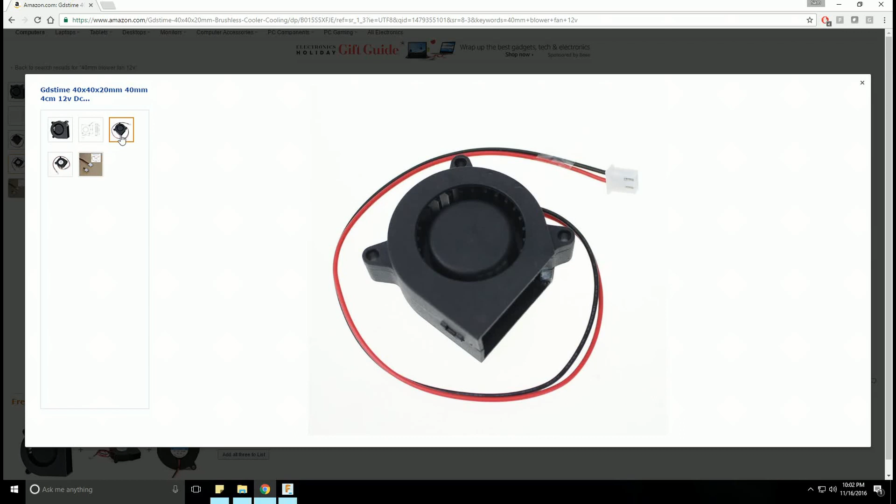What I like about this is that it barely weighs any more than a 40mm fan. It has a lot more ability to develop pressure, which is important for nozzle designs where you have restriction and the fan can't just blow in an unrestricted manner. Also, because it's a cage fan, we can mount it vertically, which means we're not going to have a lot of mass hanging off of our hot end, which should keep the hot end fairly stable and not add a lot of noise or ringing to our prints.

I'm going to be using my caliper, and I've got one of these fans in my hand right now. I'll be using that as I work through the design. I'm just doing this off the cuff. I haven't worked out any design prior to this. You're going to be seeing the design process exactly the way I would approach something if I were starting from scratch. If you don't have a caliper, I would recommend picking one up.

You can pick up even a $20 cheap one for this kind of work. It doesn't have to be an expensive machinist caliper. I'll put a link to what I'm using down in the description as well, in case you want to pick one up. It's helpful whenever you're designing things that need to fit or have specific dimensions that need to be accurate or match up. It's a good tool to have if you want to get into functional design and 3D modeling.

Okay, let's get started.

So Fusion 360, just briefly, I'm not going to go into the whole how to download or install it. There's plenty of instructions for that online. All you need to do is go to their website and you'll find the links you need. They have a pretty wide breadth of licenses that you can qualify for, anywhere from a student or educator to a free trial to actually free use as a startup or a hobbyist as well. So pretty much anybody out there is going to be able to find a license that works for them and provides 100% full functionality. You're not going to have any features that are disabled or withheld.

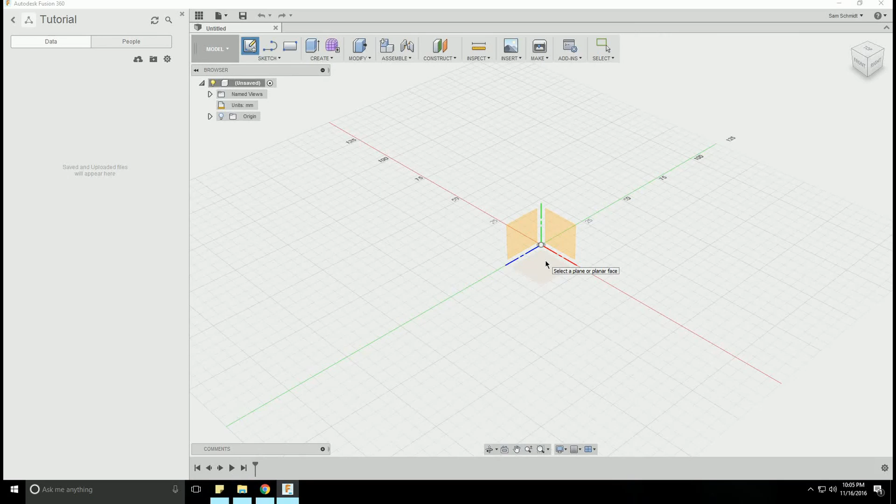So we're going to start with sketch. I'm not going to try to explain every single menu or submenu ahead of time. We're just going to take them as we hit them. Right off the bat, I'm going to start with a new sketch, and it's asking me which of the three planes, X, Y, or Z, I want to begin, and I'm actually going to begin in the front plane here.

Okay, so to start off here, I'm going to be just drawing a rectangle, and we can do it with a 2-point where we mark opposing corners, 3-point, or center. I'm going to do a center, put it right on the origin here. We're going to open it up.

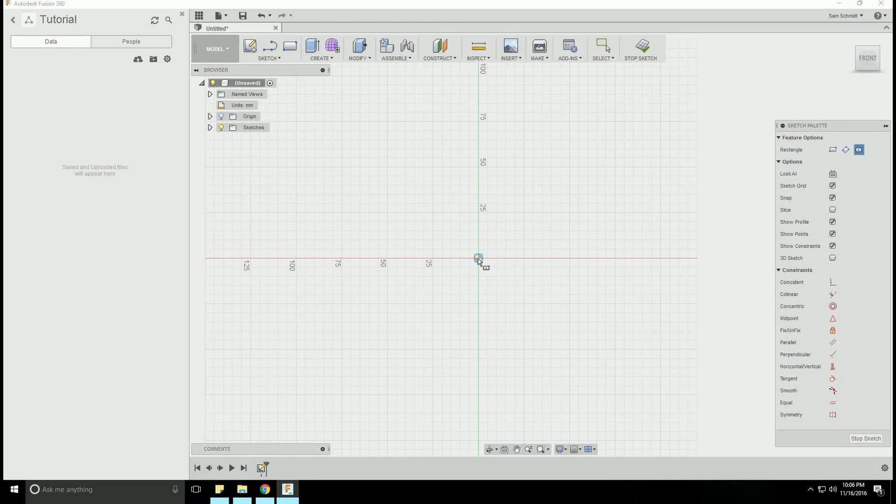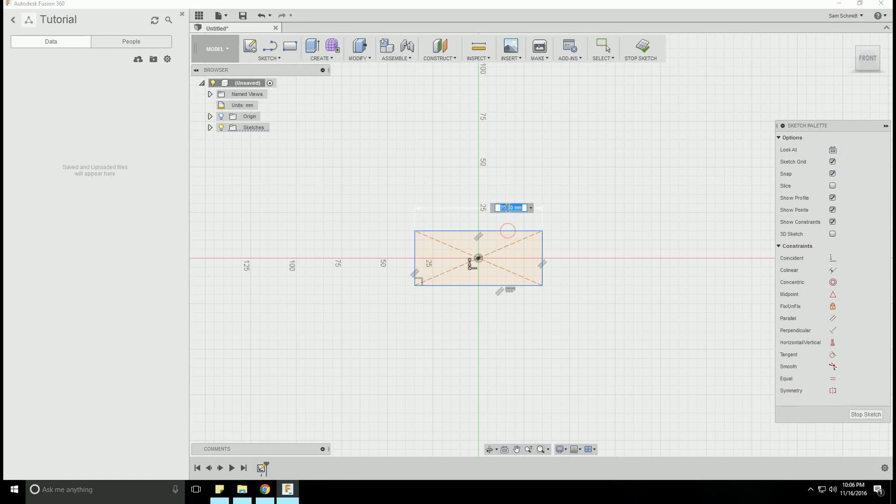I did a couple measurements on my Monoprice Select Mini before I began the tutorial, and I think I want roughly a 60 millimeter long rectangle, and you'll understand why I'm doing that in a minute. I'm now going to go down to sketch dimension, grab this side, and type in 60, pull that in.

And then the fan is approximately 20 by 25 for an opening. So I don't want my shroud to be too much smaller than that, because even though it's a blower fan and it's able to produce more pressure than a standard rectangular fan, the more open we can leave our duct, the more air we're actually going to get for cooling our part, which is the whole goal here.

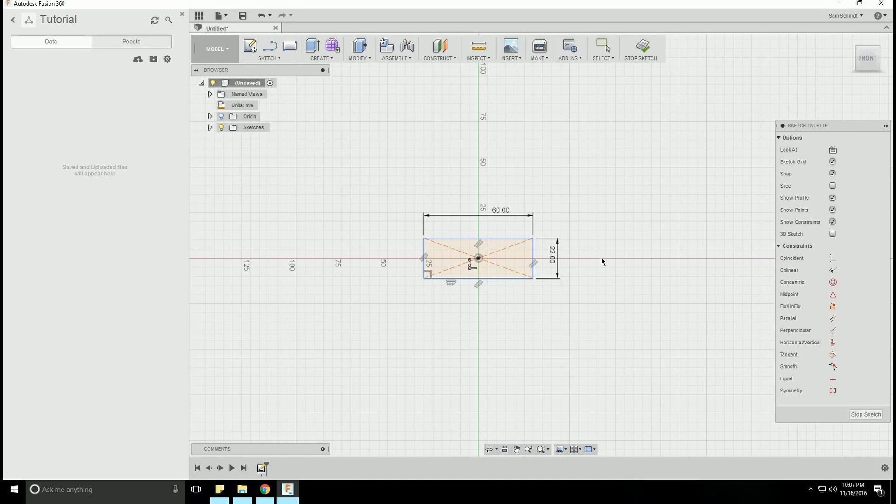So I'm going to set this other dimension, for the moment anyways, at about, let's do 22. I'm just throwing that out there. We'll see how long that stays around for, but let's throw that out there. Okay, so there's a rectangle, and you're probably going, wow, this is not a very good fan duct.

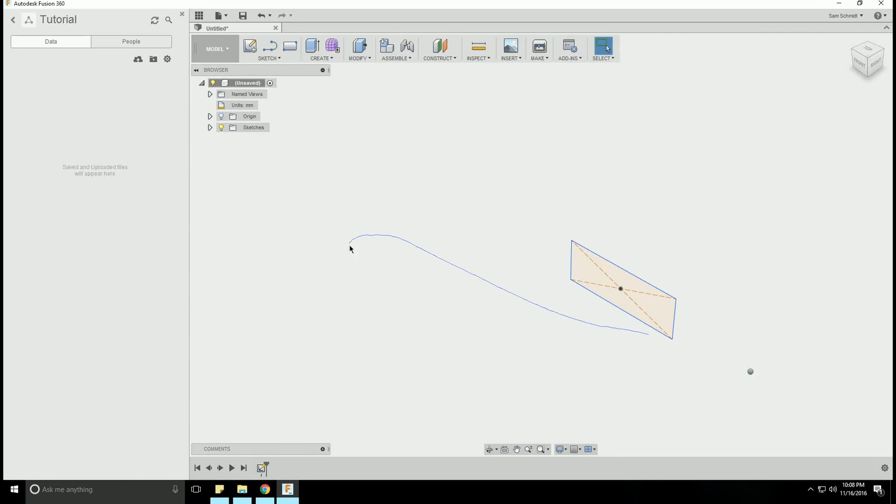What are you doing? And you will find out shortly. So I'm going to stop sketch, basically end the sketch and finalize it. Next, I am going to create an extrude, and it's going to ask me to select a profile. And I'm just going to select the sketch that I just created.

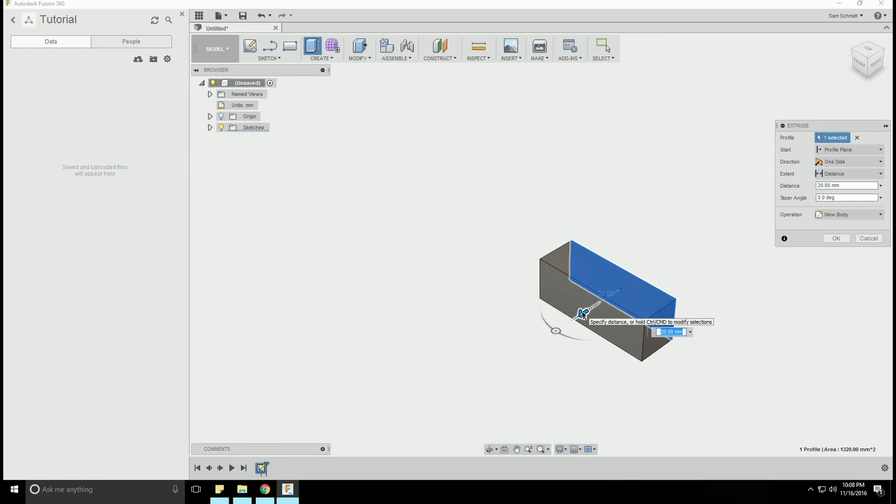There's a couple ways of doing this. You can type in a specific dimension, or you can grab this arrow and drag out your extrude. Again, kind of going off of my gut here, I think we're going to want a roughly 30 millimeter depth here. And we'll be able to go back and fine tune these if we need to as we go along.

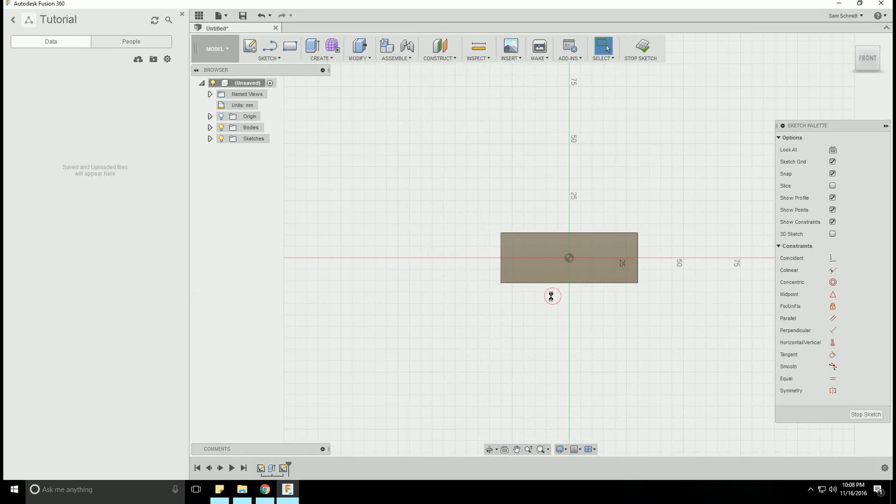Now I am going to create a new sketch, and I'm going to actually start that sketch on this face. And this is going to be the profile of our cooling shroud.

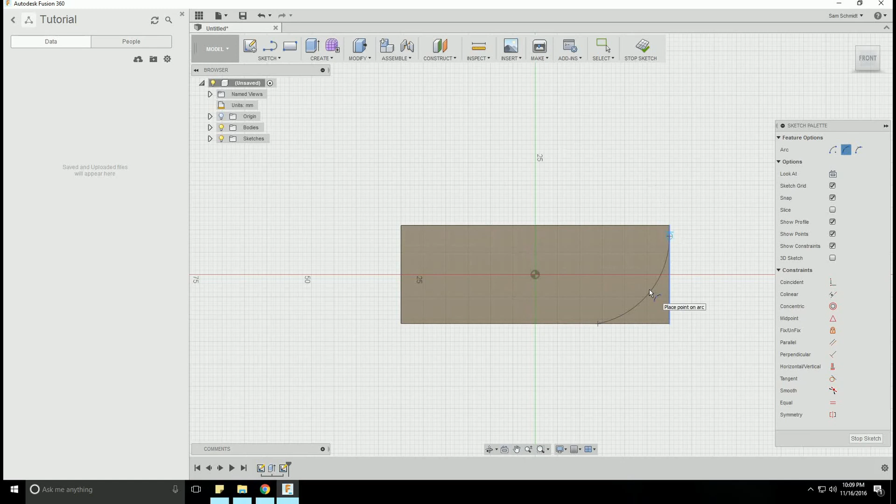Now, a couple things. We're going to go up to sketch. We are going to grab an arc, a 3-point arc, and we're going to begin it there, and end it roughly there. And when we get the tangent marker here, we're going to confirm.

Next up, we're going to go back to sketch. We're going to grab another rectangle, and we're going to make a 4 millimeter line, and we're going to go in about 25 millimeters.

And actually, we're going to tweak one dimension on that. We're going to make this 3.5. There's a method to my madness. We're going to go back to arc, back to 3-point arc, and we're going to grab here.

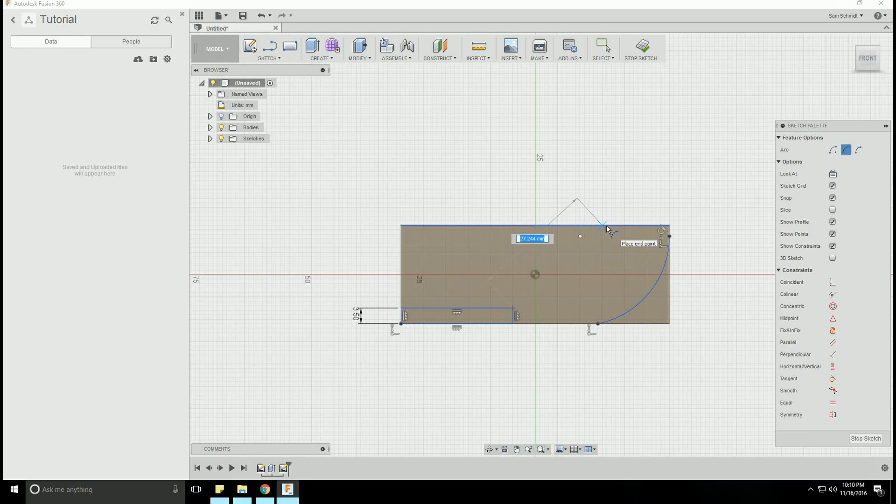Now, I want this endpoint to be roughly the width of our blower fan opening, which is right about 20 millimeters. So I'm going to select here. I am going to place the arc.

Then I'm going to go back to dimension. I'm going to grab the arc endpoint, grab the side of my shape here, and push this out to 20 millimeters.

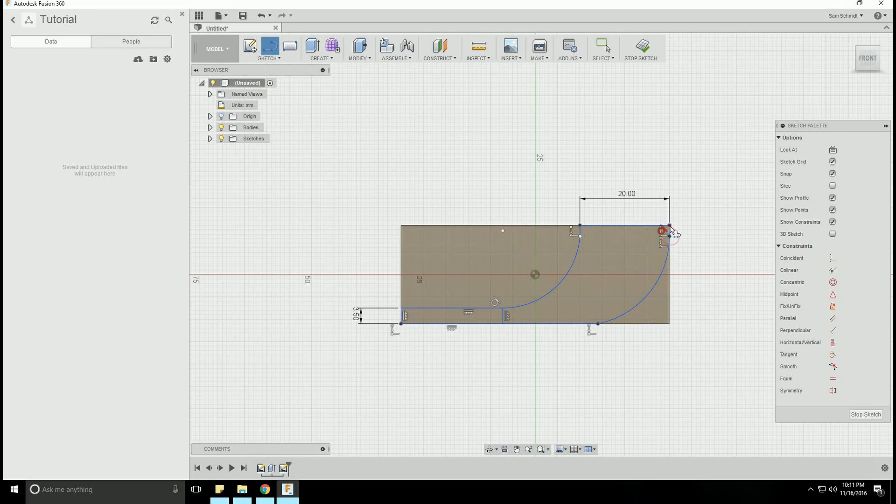Okay. Next up, I'm going to grab just a line. I'm going to connect this arc to this rectangle. And what I'm doing now is I'm just creating a closed sketch so that we can extrude this.

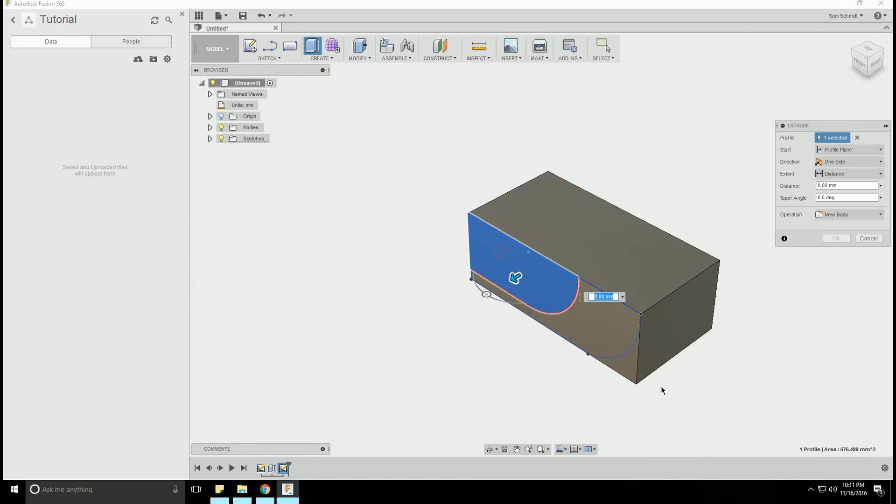Okay, so I'm going to go to create, go to extrude, and select the profile, select one side, extent all, and instead of operation of new body, I'm going to do cut. So I'm going to remove material, and then flip the direction. We can see here that with those constraints, it's going to remove all of that material. I'm going to select OK.

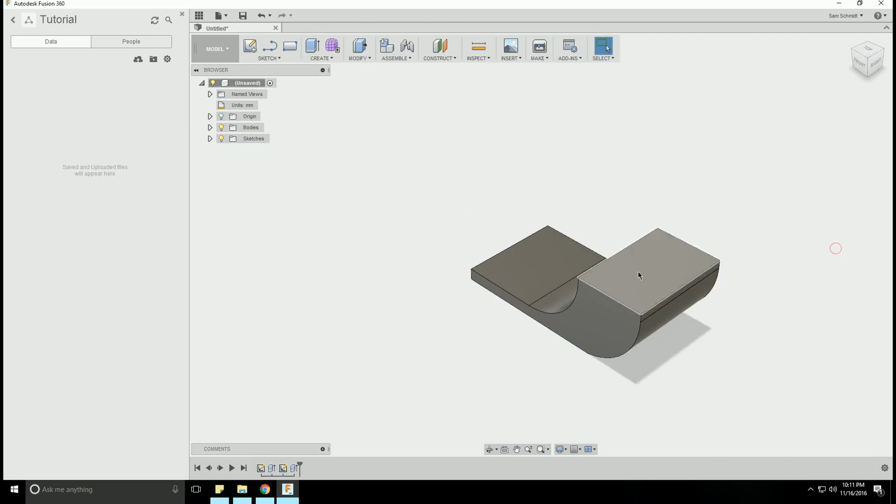And now, just maybe, you'll be starting to see our fan shroud take shape. Now, if you can imagine, because I haven't explained where this is going to mount or how this is going to mount, but if you have a Monoprice Select Mini, if you can imagine your hot end coming straight down here, and if you can imagine a semicircle cut out of this so the air can blow in from multiple angles.

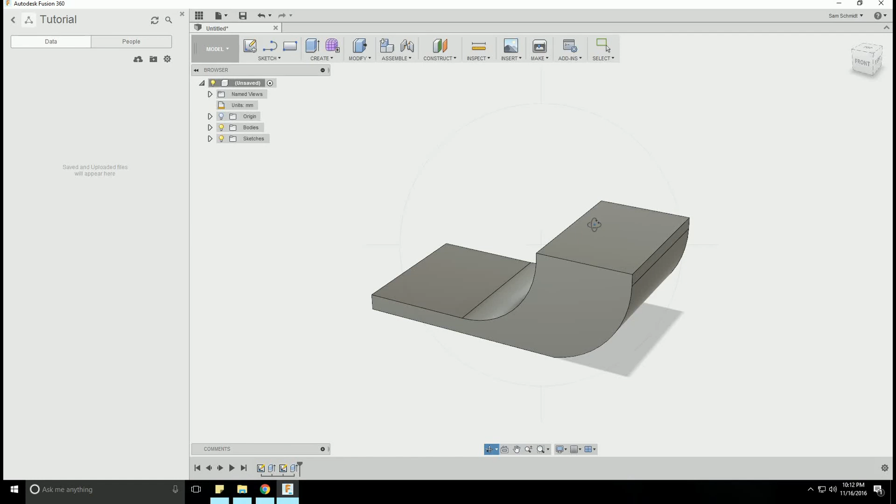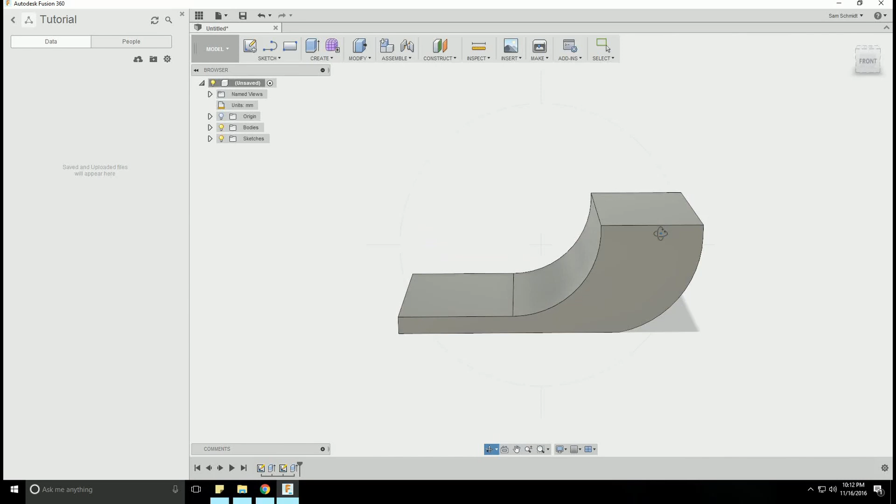And if you can imagine that this is hollow and there's a fan mounted right on this top section here, you can kind of begin to put together the rough goal that I have. And mind you, I'm working this out as I design it, so we're probably going to be tweaking this quite a bit. And you're designing this along with me, hopefully, so you're free to take this design in whatever direction you want to once you begin it as well. It'll be interesting to see what people come up with out of this tutorial.

Okay, so next up, we are going to create another sketch.

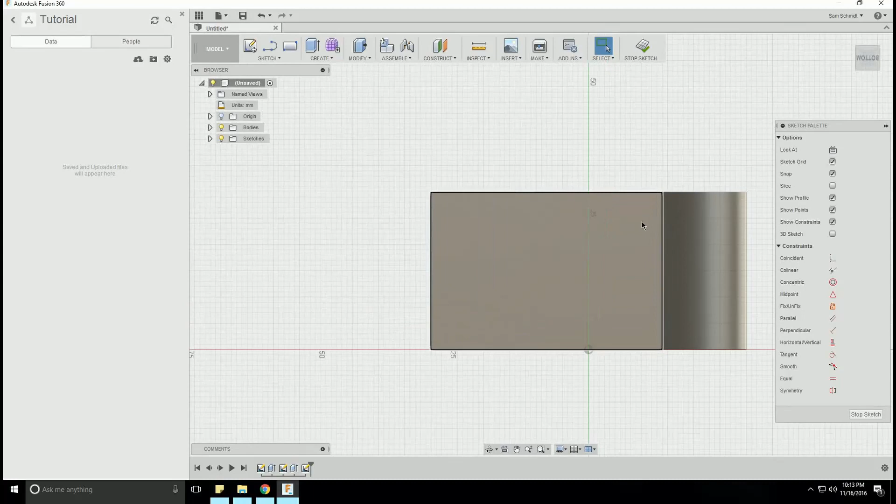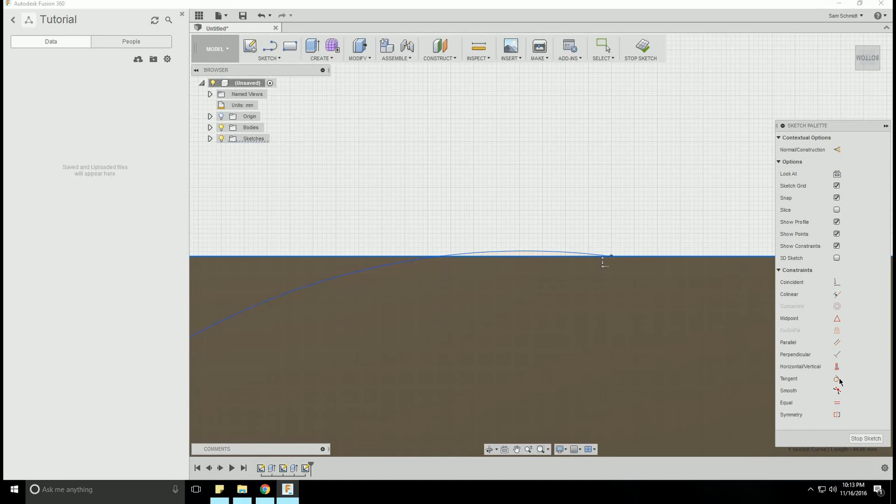We're going to look at the bottom of this and make a sketch here. We're going to grab a 3-point arc and put it roughly in the middle. Now, I don't want this space right here—I want this to be tangent to this line. So I'm going to grab those two and go tangent. There we go.

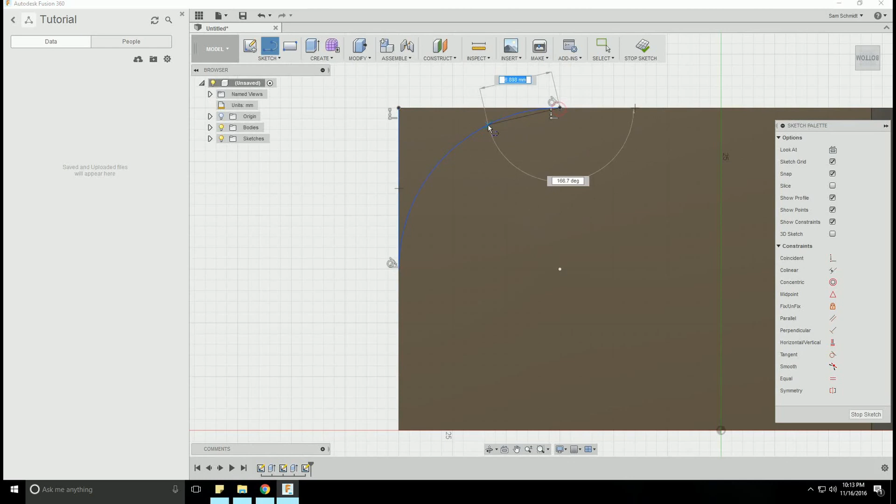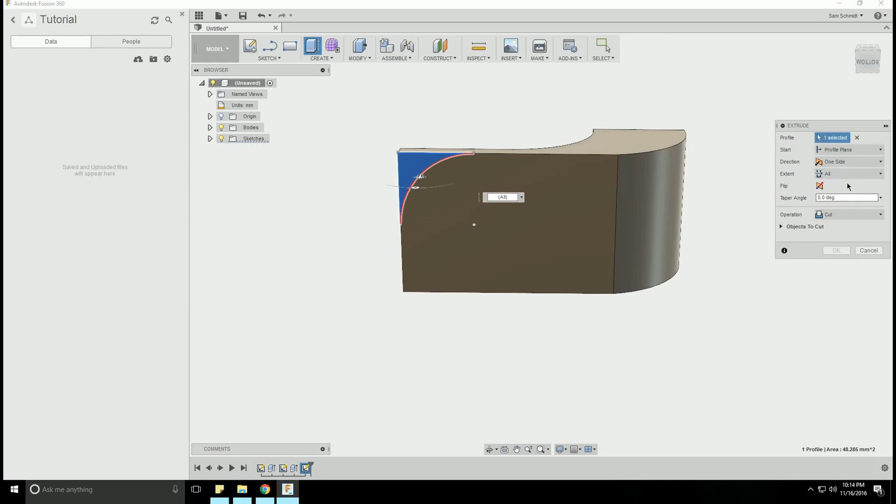Alright, let's close that off using a line. And I'm going to stop sketch. I'm going to extrude, select that sketch we just made, select operation cut, extent all, flip the direction, and click OK.

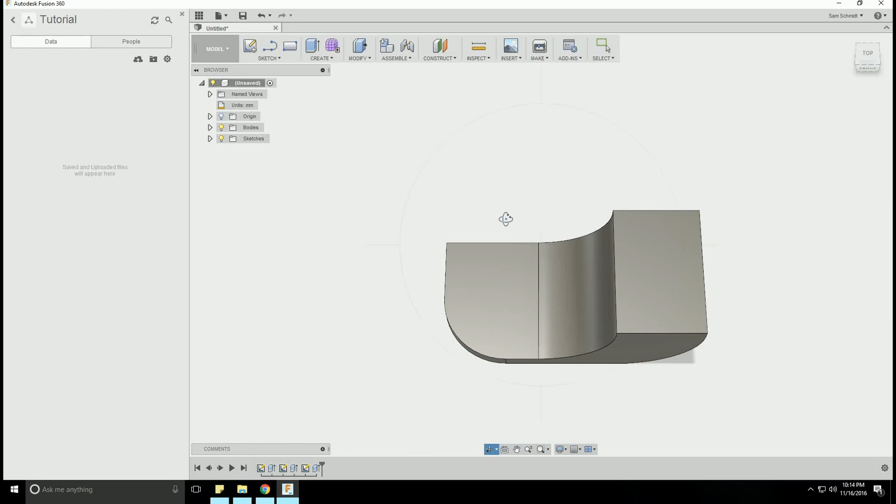And we are headed in the right direction. Now, we need to know if this is going to blow right up next to our nozzle, without blowing all over our heater block and unnecessarily wasting energy. What kind of radius do we need to cut out of here? If you look at your hot end, if you're using the stock hot end, you're looking at needing a radius of roughly an inch, or roughly 25 millimeters. So let's start with that idea.

Let's do another sketch, from the top here. Let's make a circle from a center diameter. I'm going to throw it in at an arbitrary point here, and we want it to be about an inch.

And we can grab this and move it around, so you can imagine as we move this around where the air is going to be blowing and how that's going to encompass the nozzle. The goal being that when we're done with this, we'll have it directing air not at the nozzle, but just right around it and down, so that as the plastic is being extruded we're blowing on it when it's appropriate, creating much crisper parts with clean overhangs and detailed features that sometimes get muddied if you're running with improper or no cooling and the plastic is staying molten for too long. So I'm going to go out on a limb and position it about here.

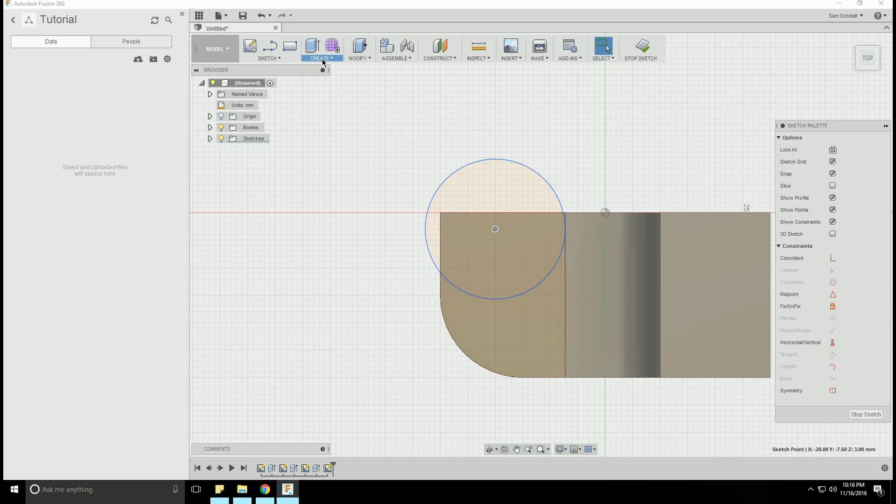I'm going to position it about there, and then extrude it. Again, we're going to do a cut, do all, flip the direction, and accept that. And now you can kind of see roughly where our nozzle is going to be located.

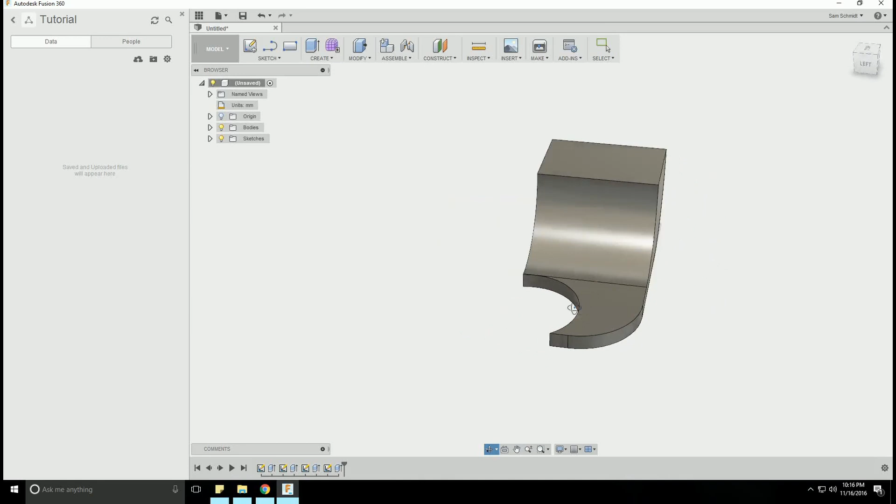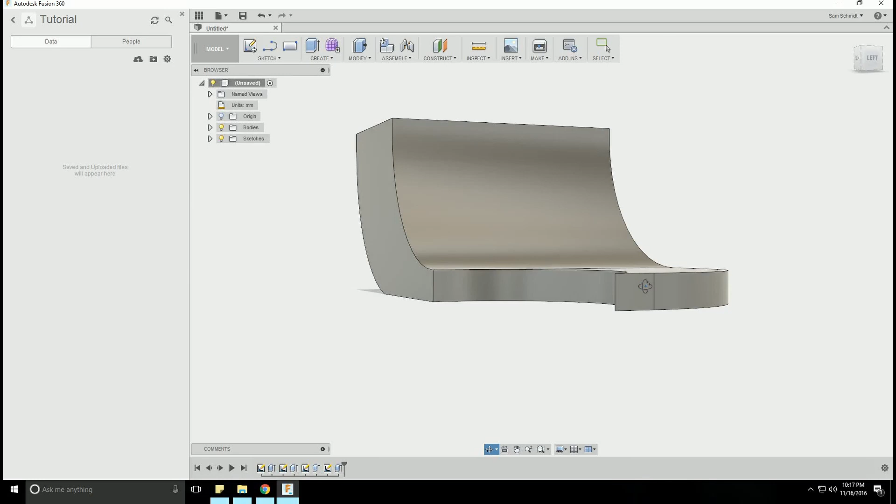Now, before we get too much further, we have to think about the direction we want our air to blow and how we're going to accomplish that. If we were to simply hollow this piece out, which we could do right now with a single push of a button, we'd have air blowing straight out. That would probably be okay, but it probably wouldn't be ideal.

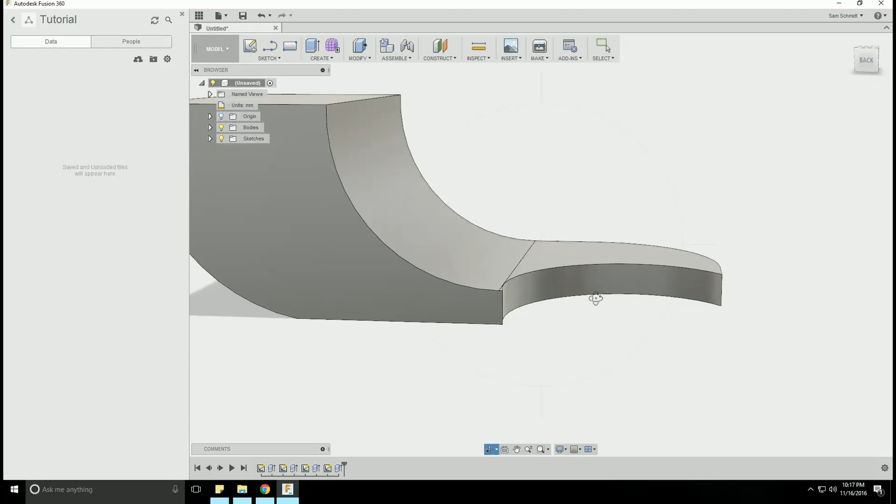So let's take a look at creating shaped airflow a little bit. It's not going to be perfect, and honestly, with the levels of airflow we're going to be generating with this fan, you're still going to get some air hitting the nozzle and the block a little bit, because you're blowing down at a surface, which generates airflow and turbulence around the heater block. But in the name of science, let's try to be a little bit intentional about this, and here's how we're going to do it.

So we're going to create a new sketch, and we're going to start it on this plane. We're just going to create a roughly 45-degree triangle, like so. And I want to leave 0.8 millimeters of material there.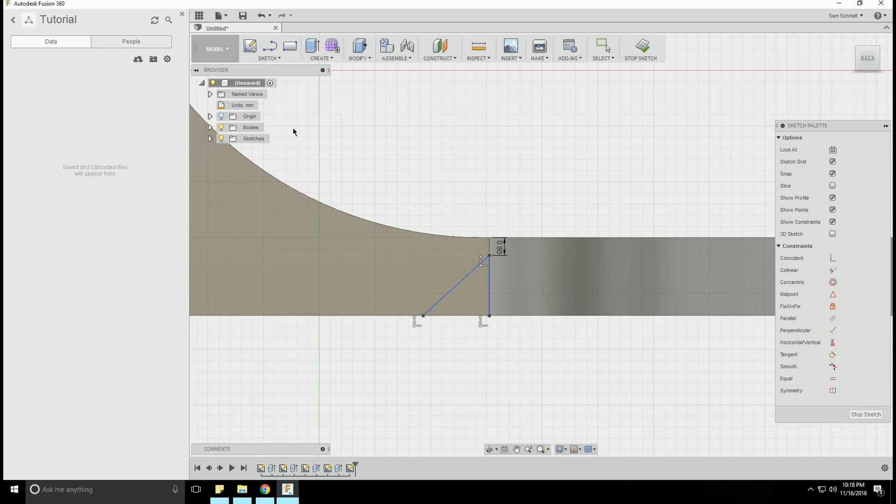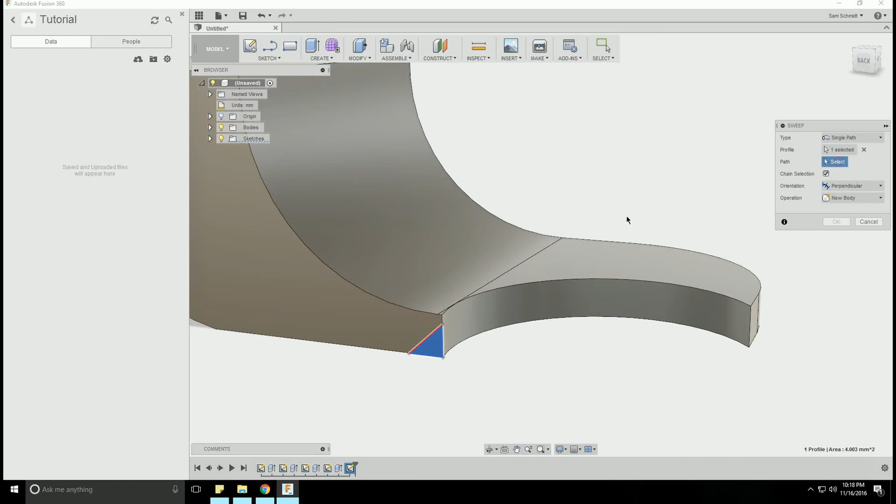And now I am going to do a create and sweep. Here's how we're going to do it: we're going to select this face, that's what we want to sweep. For the path, we're going to select this radius. And as you can imagine, we're going to be cutting. We want the orientation to stay perpendicular to the path, and that's about all we need. So we're going to select OK.

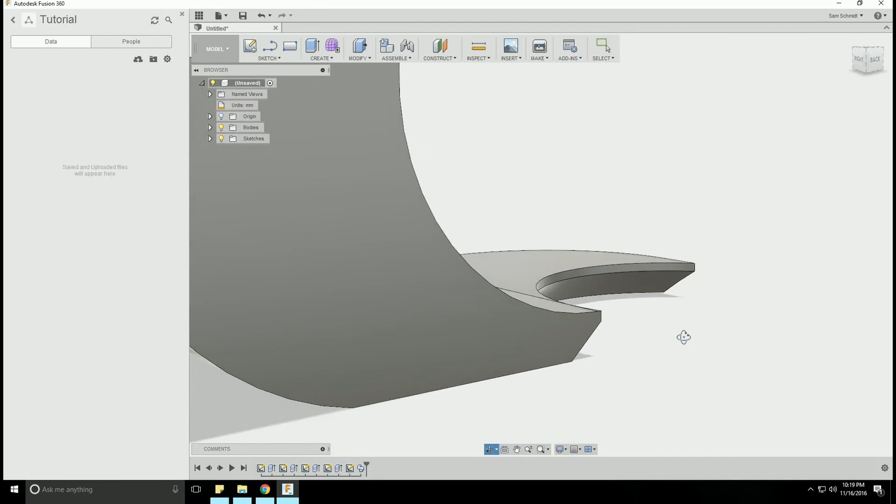Now you can kind of see that we're starting to make a little bit of sense here with the direction that hopefully we'll be able to encourage air to flow. Now, before we do anything else, let's go up to Modify and choose the shell option. We are going to shell from our nozzle face, and we want our thickness to be—let's do 1 millimeter for now.

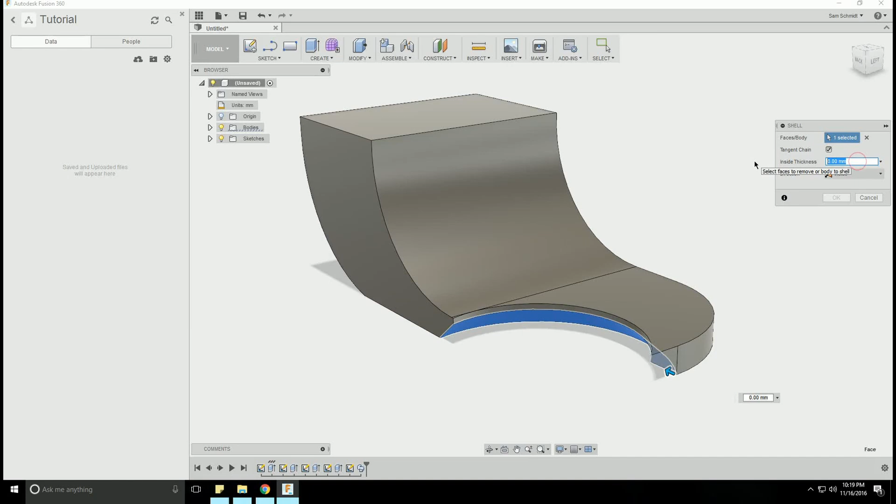Let's take a look at that. So you can see it's now hollowed out our entire shape, and it's left 1 millimeter of thickness all the way around. So that's pretty good.

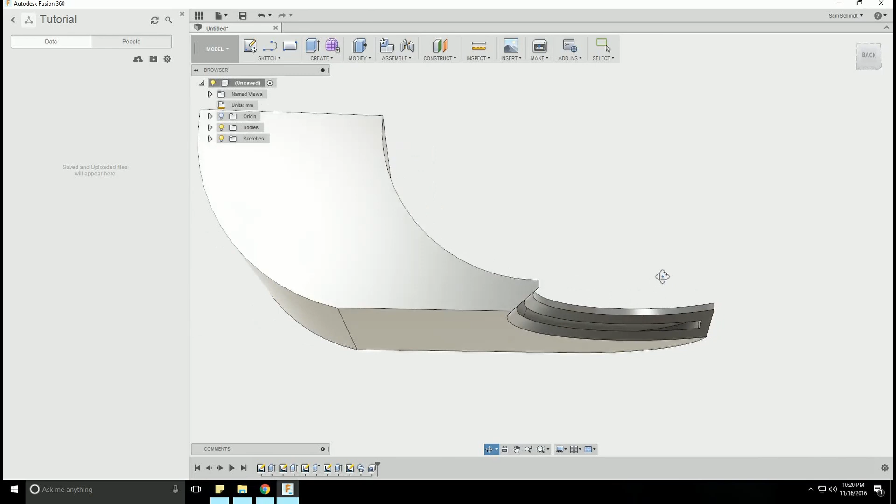I think for something like this, we could probably knock it down to 0.8 millimeters, and anybody printing with a 0.4 millimeter nozzle will be able to do a 2-shell slice. But we'll leave it at 1 millimeter because that means if you're using a 0.5 millimeter nozzle, you can still get exactly 2 shells. And if you're printing with a 0.4, you'll get 2 shells with a little gap between them, where you can do 100% fill or some percentage of infill, producing a pretty functional print.

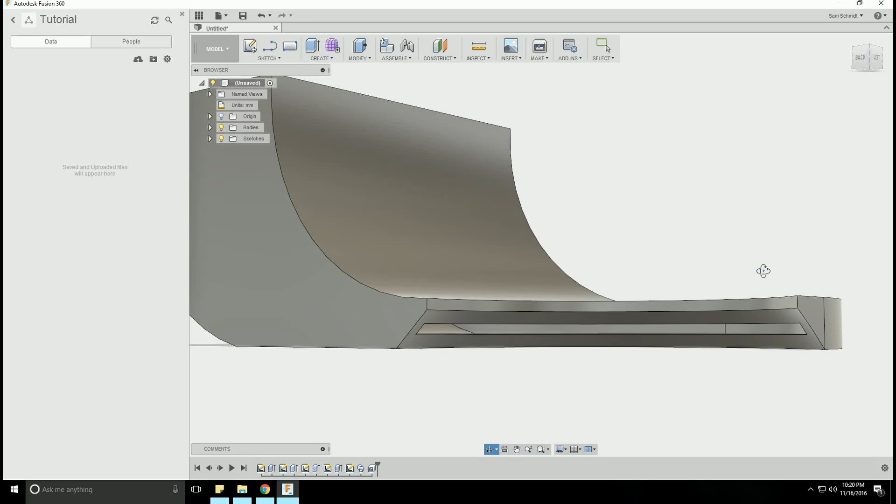Okay, so this is getting there. We've still got quite a few things to cover, and I'm going to back up that last option and show you something. Down here is our design history, so you can go back and look at every single item we've done, every sketch, every operation. I'm just going to drag it back one, and boom, our shell disappears.

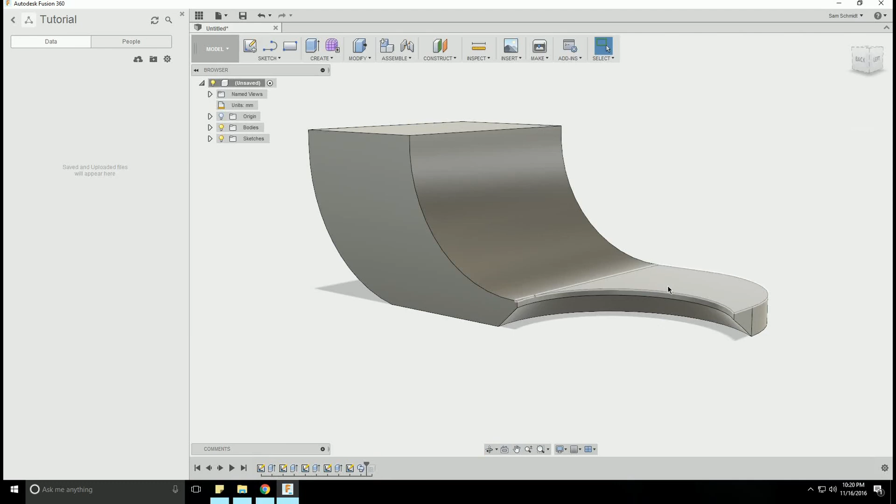One of the things you want to do before you generate shells is that if you have any type of radiusing, fillets, anything like that, you want to do that before you create the shell, because then the wall thickness everywhere will remain constant. If you do a shell and then do radiusing, it will create thin sections in your part that will not print well and will make a weak object.

So let's go up to Modify. We'll grab Fillet, and let's smooth this up a little bit just to make it look pretty. So let's grab a couple edges, and let's start with a 2mm fillet.

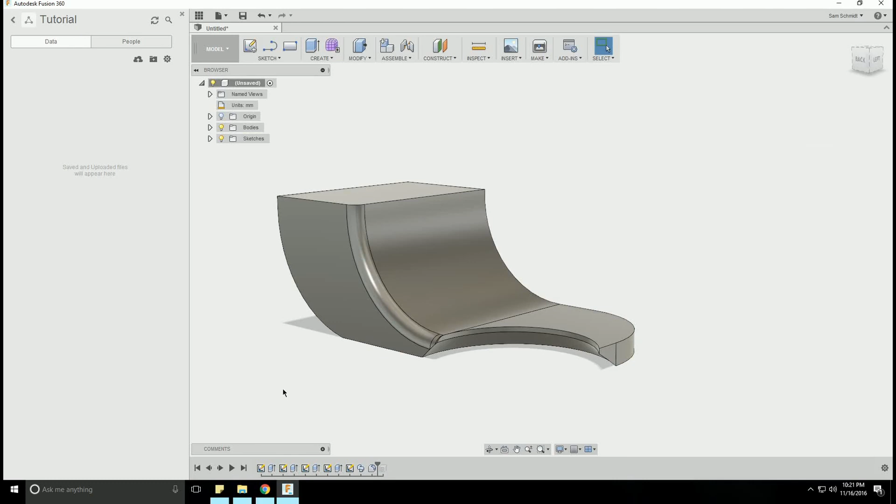Everybody just went ooh, ooh ah.

So I accidentally accepted that fillet. We can right-click on our fillet, which is the most recent item in our history, and click Edit Feature, and we can keep adding edges. Maybe, if it'll let me. There we go. For some reason it's giving me a hard time tonight.

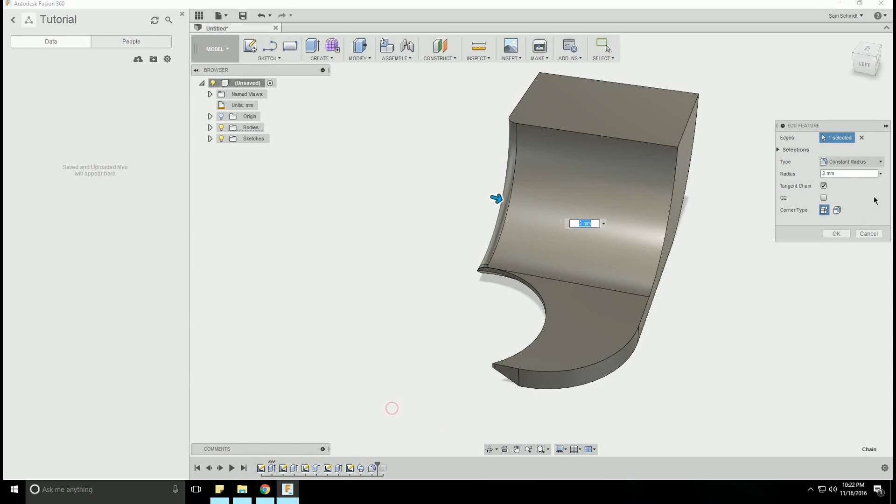Alright, let's take that from the top. So we'll select a few edges here. And then we can also use this arrow if you just want to create the radius sort of by feel. So there's a 2.5. It's pretty good.

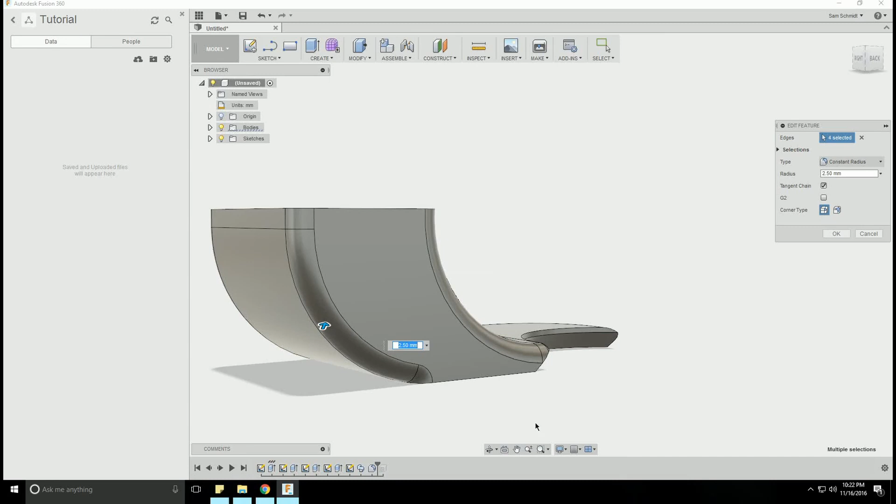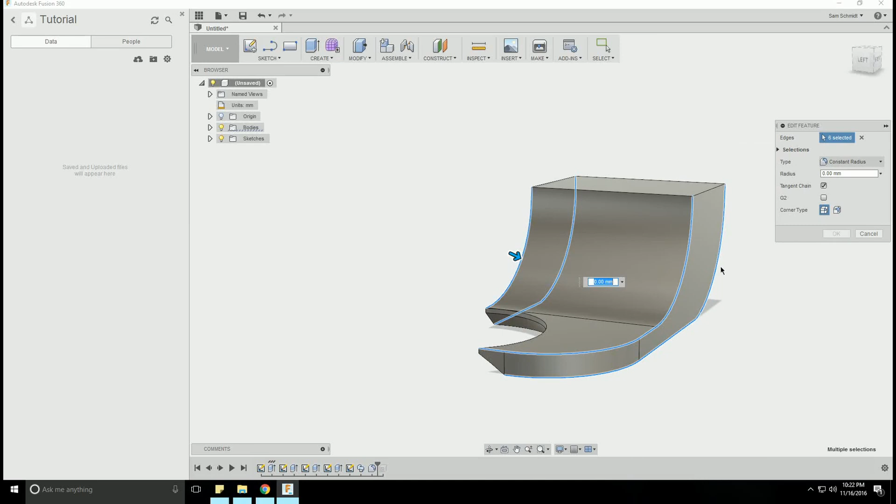Let's do something real quick before we finalize that. Okay, let's select almost all of the edges, and then let's start to add this radius here. You'll see that if I ask for too much radius, the radiuses will start to intersect, which will create an invalid operation, and we'll get that warning down there.

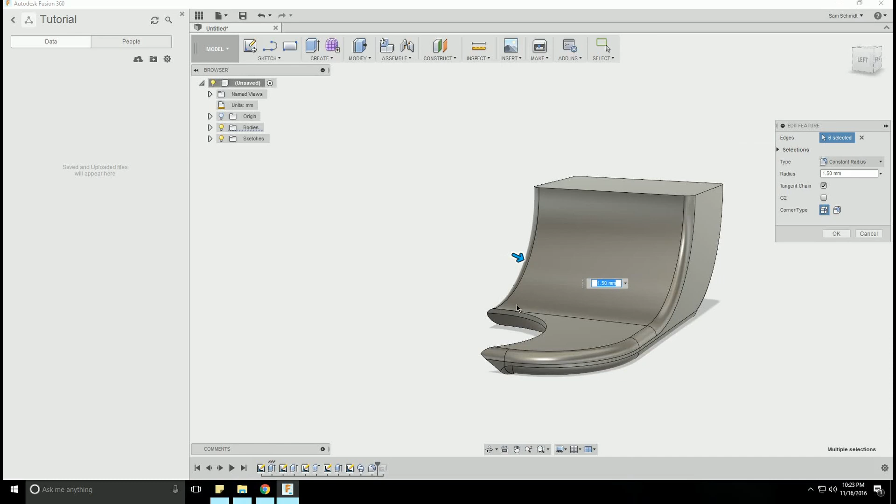So we just back it off, and it corrects itself. I think a 1.5mm fillet is what we're going to go for, and we'll select that. That looks nice. So now let's go ahead and redo that shell.

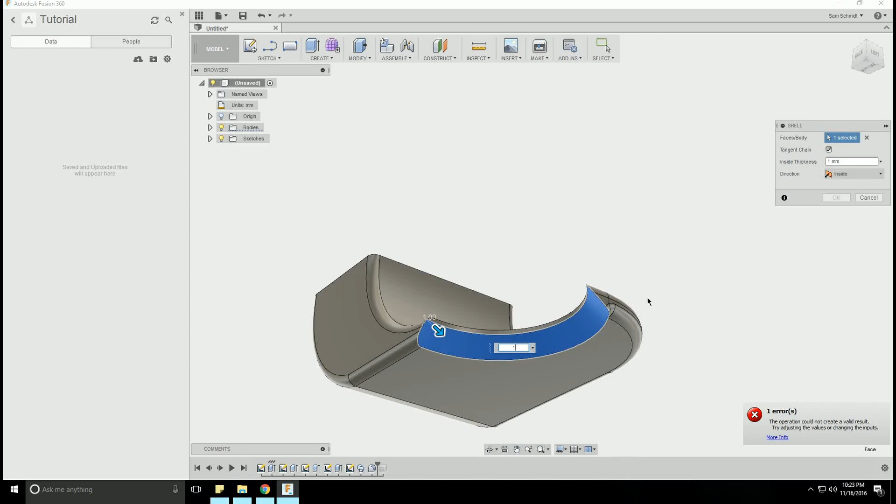Again, we'll select this face, tell it we want a 1mm shell. Oh man, what is it unhappy with? Doesn't like something. Let's see here.

Okay, so we've got some collision, and I think I know what it is. Let's go back to our previous fillet. We're going to edit it. Let's back it off to 1mm only.

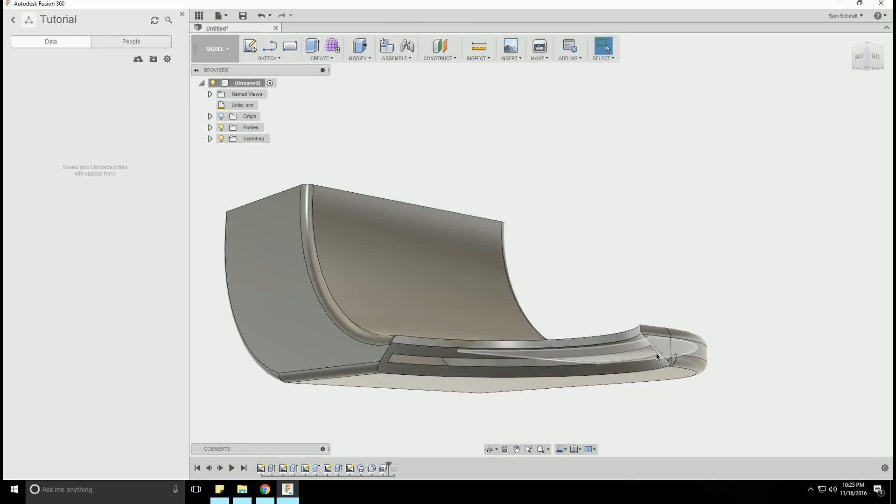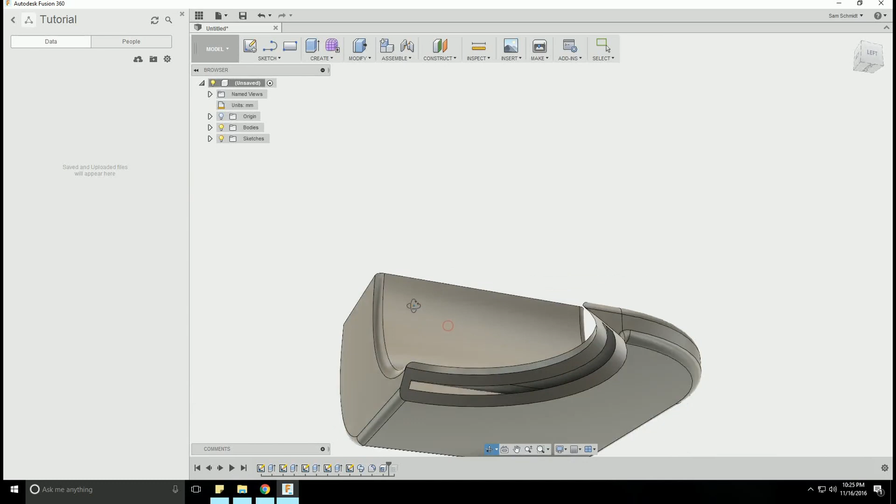Now, when we ask for our 1mm shell, we don't have any conflicting geometry. We're able to shell that out nice and easy, and still have a nice radius on the entire part. I think it was getting twisted up in this area right here, and the 1.5mm fillet that we did for the sides of the part was preventing us from generating that 1mm shell that we needed. So we are past that now.

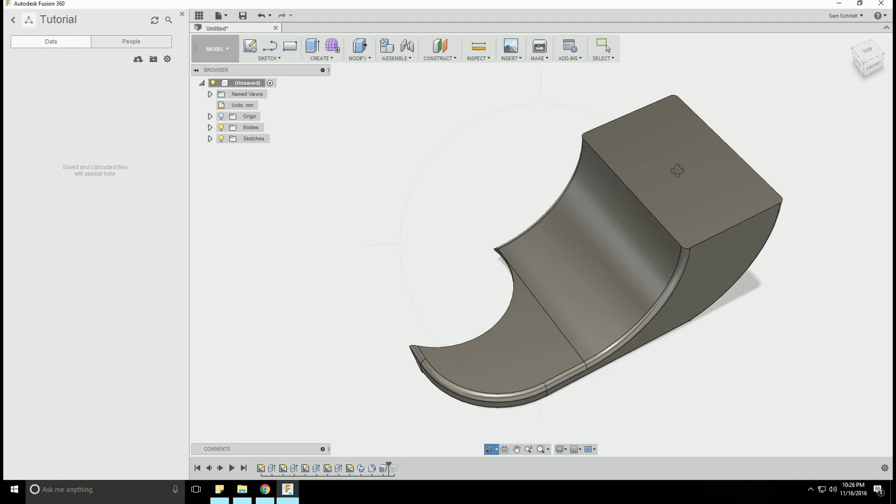Now, obviously we created the shell from one face, and the entire inside is hollow, but this is still 1mm thick, so we'll have to deal with that shortly. Before we do that, though, let's create a flange that will fit inside the face of the blower outlet.

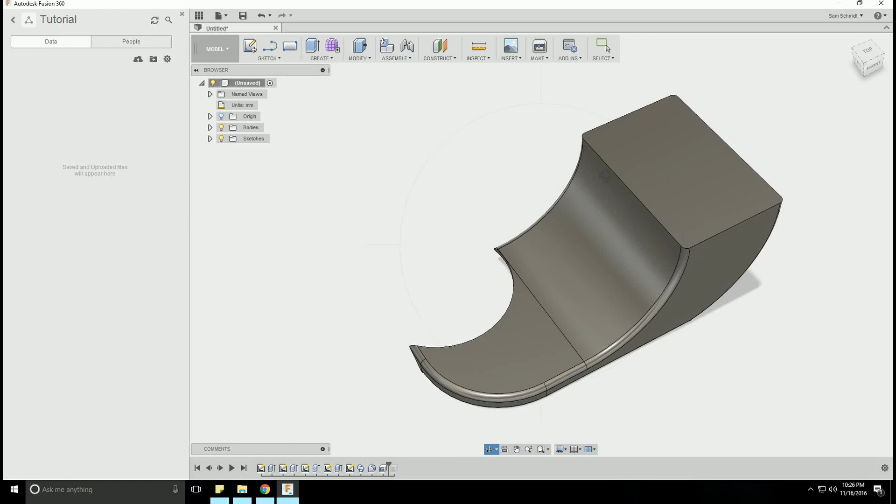Now, from the fan that I have here, I can measure, and our inside dimensions are about 16.25mm by about 26.75mm. However, there is an angle on one side of the opening that we'll have to account for. But first things first, let's generate those dimensions.

Okay, so we're going to start off with a center rectangle, and we'll add our dimensions. So we're looking at about 26 3/4, and we're looking at about 16 1/4.

There we go. Okay, so this is the inner dimensions.

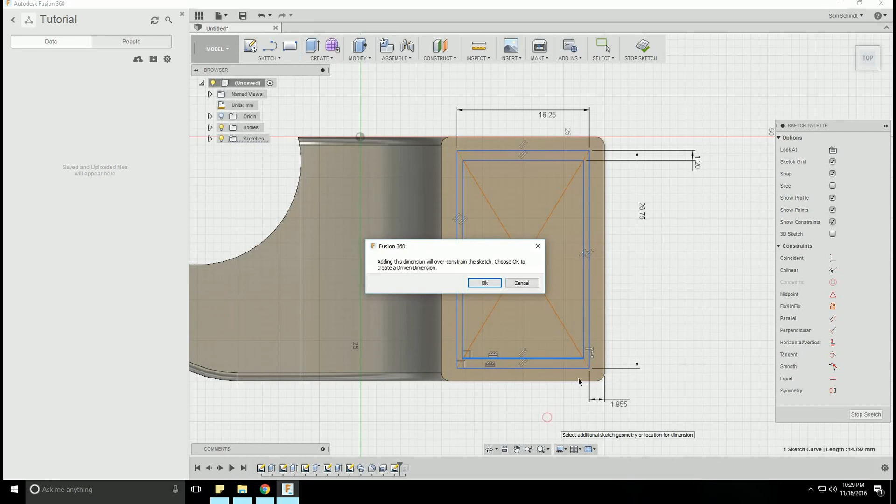What is overconstrained here? It should not be overconstrained. What is that? Yeah, that doesn't like that. Something is causing us a problem here. What constraint is it? Let's remove that and see what we get.

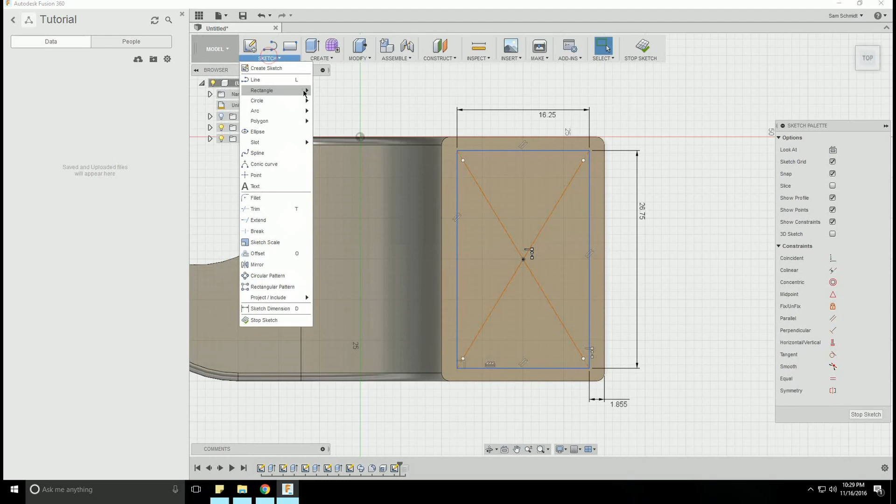Oh, okay, I must have accidentally added a constraint in there that I did not realize I was doing. Let's try that again. Center rectangle from this center point.

Oh, that's what the issue is. I allowed my cursor to snap to the same proportions as the existing rectangle. And when I did that, it would no longer let me alter the ratio of the length to the width. We don't want that, so we don't want to have it snap to that. The only thing we want it to snap to is the center of the pre-existing rectangle.

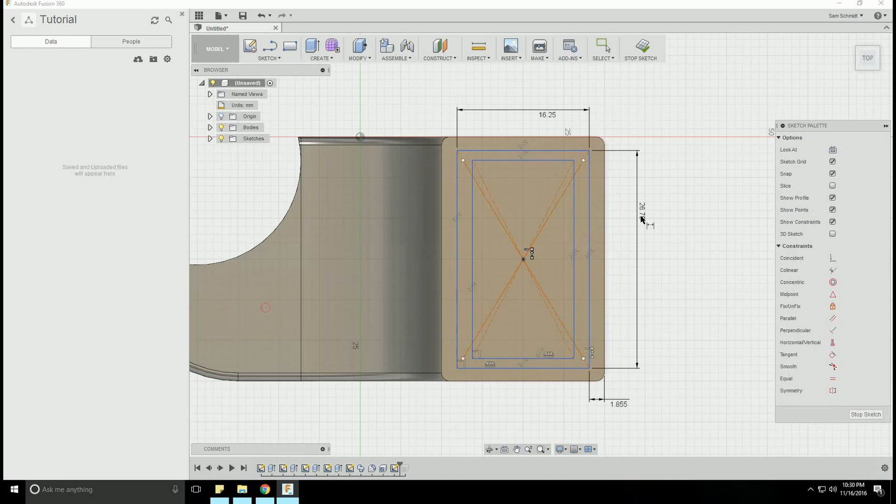So let's do that. Go back to sketch and dimension. 1.2 millimeters, that worked out kind of nice. And 1.2 millimeters there we go. Now we've got a constant thickness flange here.

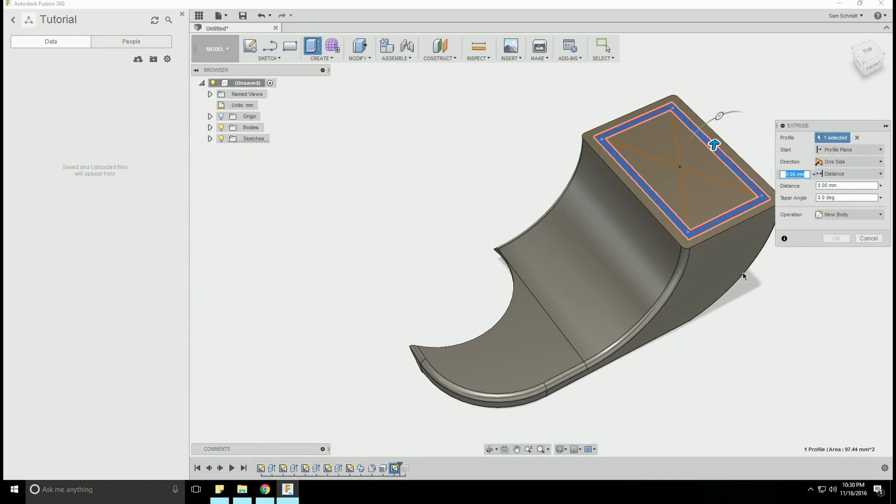We're just going to extrude this up. We'll select that, and let's just go up 2 millimeters. Okay, perfect.

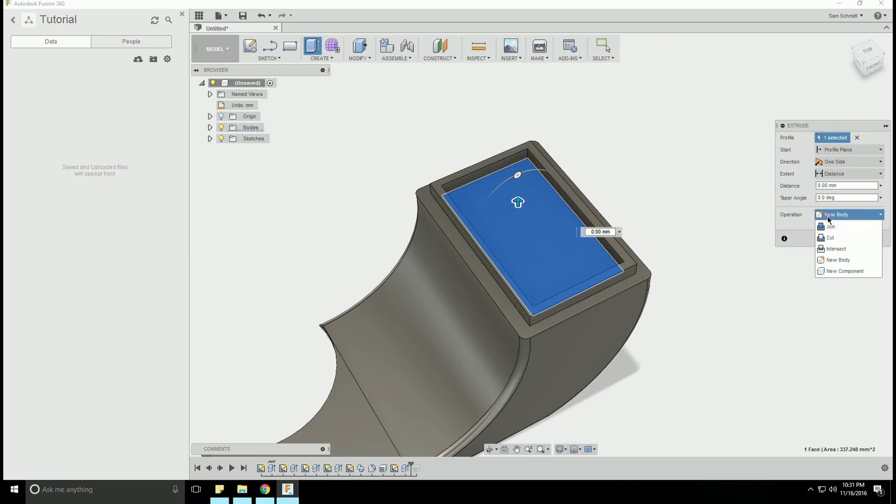And let's finish hollowing this out. So we'll go with a... we'll go with a create extrude, not modify. We'll just select this surface that's sort of created for us automatically. Operation cut, and then we'll go down 1 millimeter, which is the thickness of our shell. That completely removes that surface. We'll select OK, and we now have something that's actually beginning to look like a fan shroud.

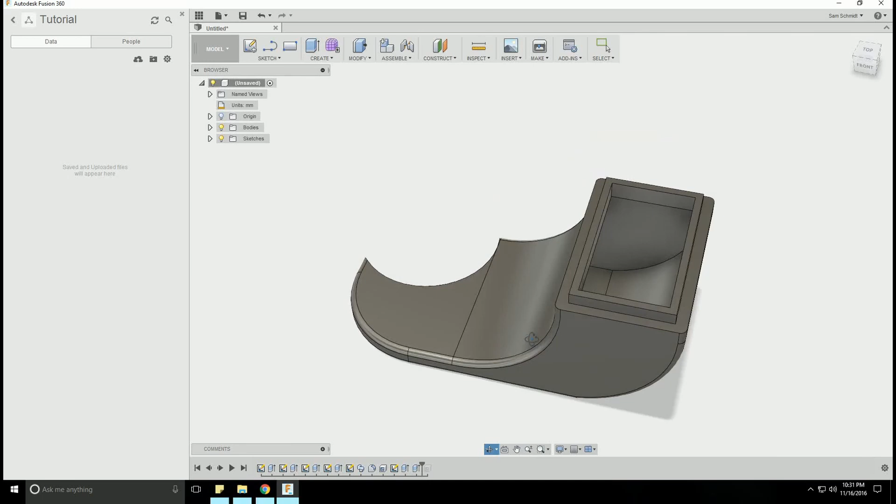Now there's a lot of directions you could go with this. For example, if you wanted this to be more of a 360-degree shroud, before we had done our radiusing and our shell, we could have added a feature on this side that created more of a 270-degree circle and transitioned into the side of this to try to blow air not just from the front and side, but from the front and two sides.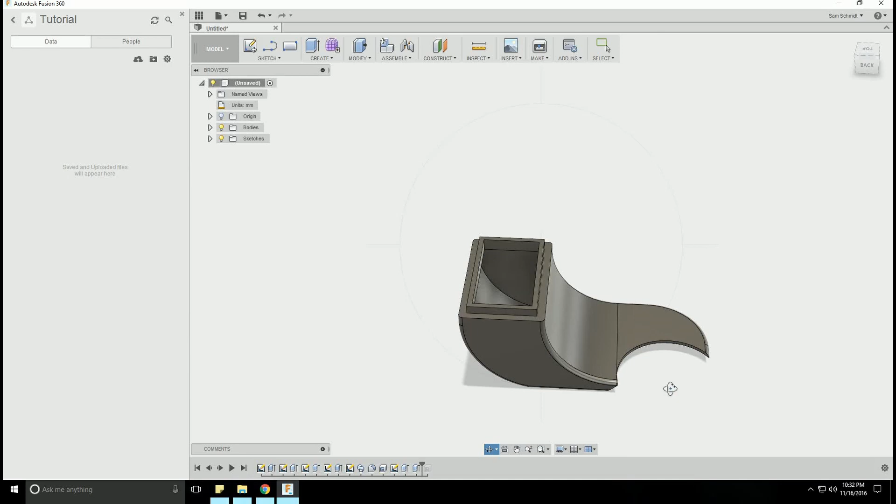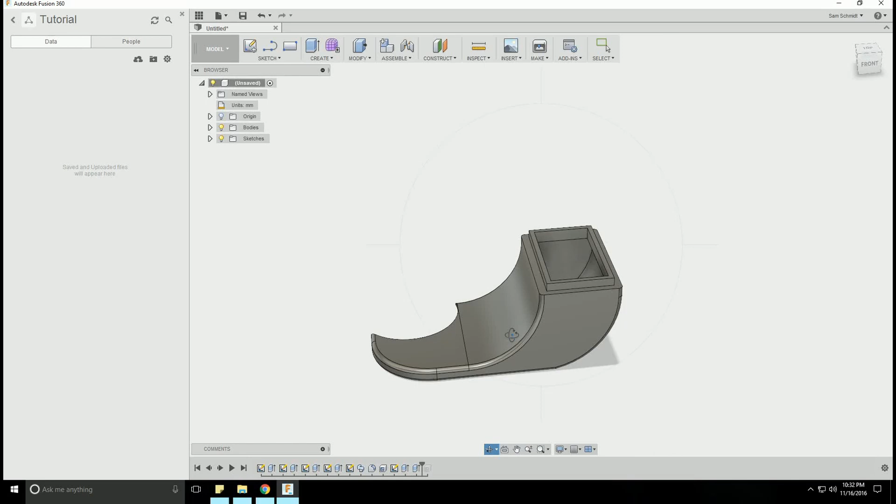One of the constraints with the Monoprice Select Mini is that the hot end carriage homes basically up against the side of the machine on one side, so we can't have any portion of the cooling shroud wrap around that side of the hot end and run into the side of the printer when it homes. So we have to come in from the right side of the hot end as we're facing it, and our cooling nozzle has to stay on the front, the right side, and the back. It can't go any further over. So that's one thing to keep in mind. That isn't a limitation on other printers that we have to work around.

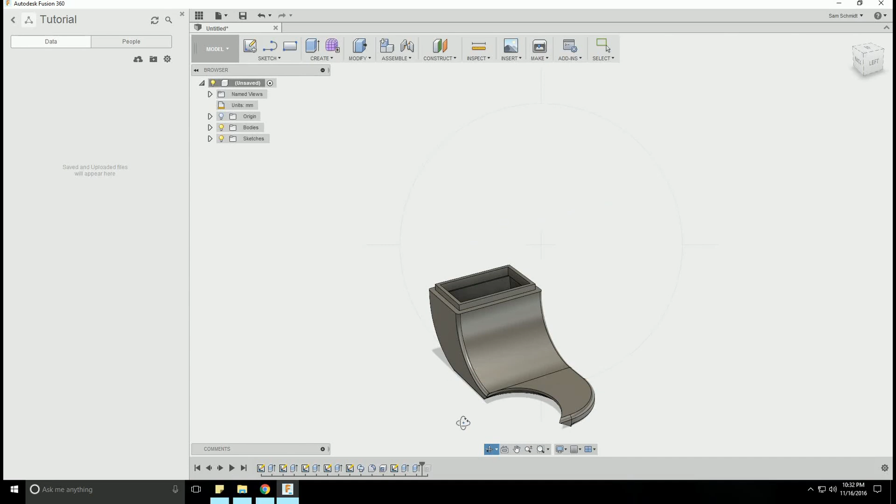But to be honest with you, even if you used it exactly like this and you didn't add any additional cooling nozzle orientation to it, with this cooling fan, which is going to produce a lot more air than most 40mm fans, and certainly more than the 30mm fan on the stock unit that is used for both cooling the hot end and cooling the part, you're immediately going to have much improved cooling.

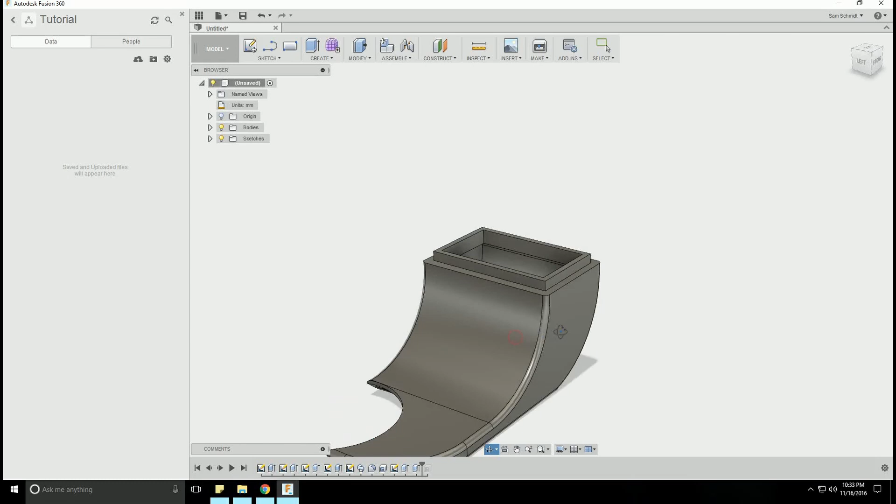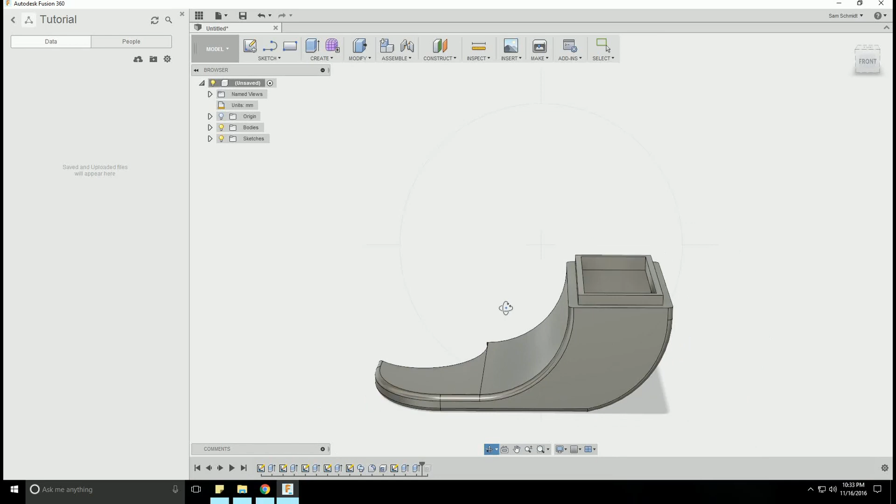Okay, I think I'm going to call it here for the first tutorial. I don't want this to get too long, so we're going to stop here, and we'll pick up next time with adding a bracket so that the fan can sit on this flange, and then a screw can hold it in place. And then we'll be looking at how we're actually going to mount this to the hot end.

One of the ideas I initially had was that I would take my ABS hot end cooling fan shroud and morph it into this part cooling fan shroud, so that you would have the ability to disable the part cooling fan and print just with the ABS hot end cooling fan, and then you could enable the part cooling fan if you're printing with PLA or something like that, where you need that extra cooling for good prints. So that might be an option.

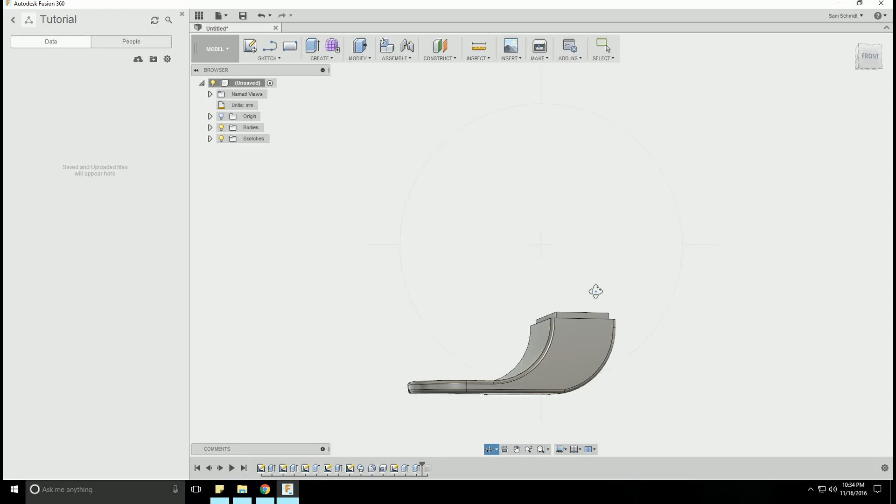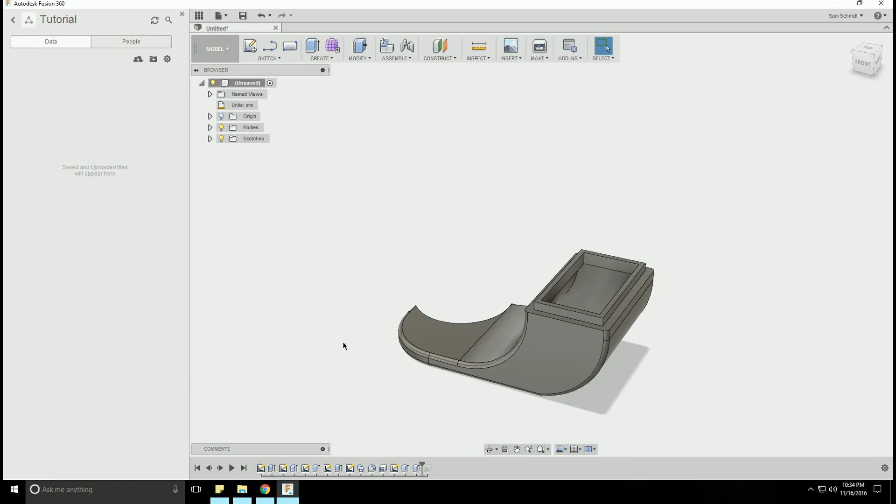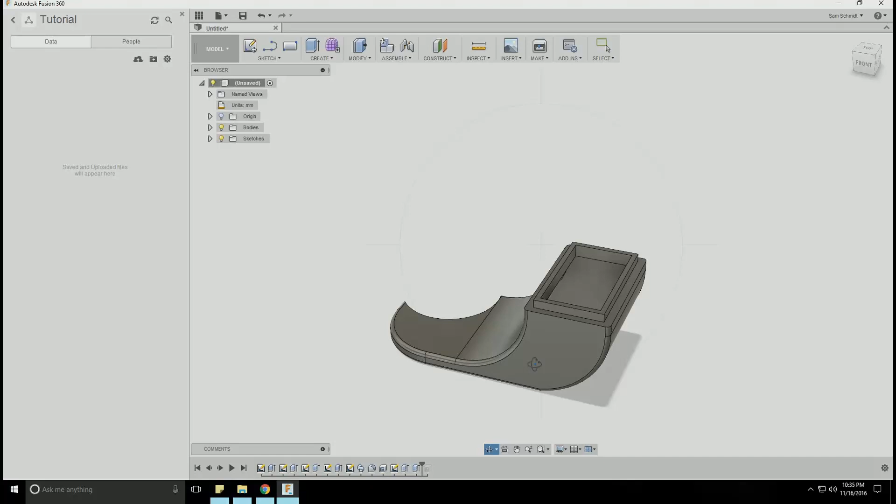It's possible we will make it mount as kind of a standalone shroud that doesn't rely on anything else. We'll see. And obviously, if you're following along with this tutorial yourself, you can take this design in any direction that you want. Well, thanks for hanging in there with me, and I hope this is getting people interested in design, getting your feet wet, and hopefully by the time we're done with this, you'll have enough knowledge of the basic workflow of Fusion 360 to start from scratch with some of your own ideas, start creating. Downloading things from Thingiverse or other part sites is great, and you got to start somewhere. But once you start creating your own designs, it opens up an entire new level of functionality for your 3D printer. Alright guys, we'll catch you next time.